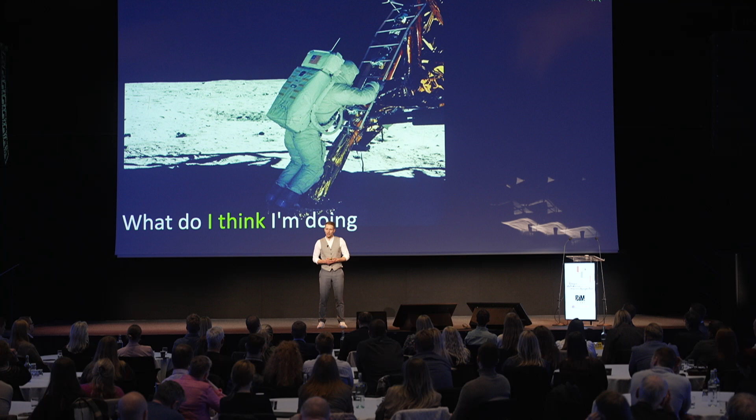80% of our work is really boring - meetings, reports, quality assurance - and only 20% we can just play and have fun. So in today's presentation, I'm going to show you how we can change this ratio, 80-20, to have much more fun with the use of programming.

As been said, I'm Krzysztof Wojslaw, you can call me just Chris. I've been working 10 years as a bridge designer in Norway. Two years ago, I started my own company called learngrasshopper.com. Today, on my learning platform, I already have 3,000 engineers and architects from all over the world, and we are together transforming engineers' and architects' work into fun with the use of programming.

For those who are maybe familiar, I'm also the BIM Corner founder, where every week we try to post new things about developments in BIM technology, especially in Norway. I'm also connected with the university - I really like to spread knowledge at NTNU, the Norwegian University in Trondheim, where we have lectures about Grasshopper, Python, and C#.

And it's really game-changing when the new generation of engineers come to work and already from the first day start to apply Python and Grasshopper scripts. I try to teach Grasshopper in a fun way, so it's more interactive. I really feel that gamification of all the tasks and exercises just gives motivation to all students. And coming back to the main topic, AI is everywhere.

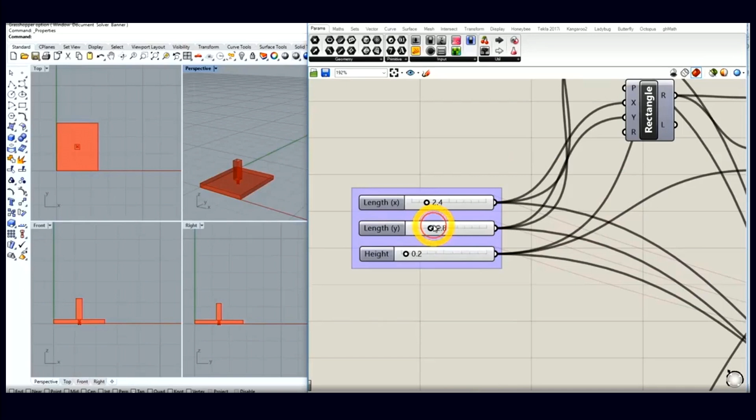As one parameter, we have the central force for the column, and we have the ground capacity. In this case, we would like to optimize the shape of this foundation.

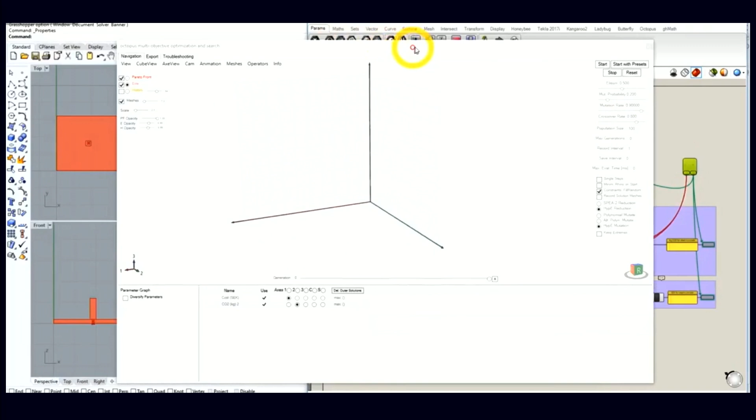But we, as designers, have to define what will be optimized. So we need to define new parameters: the price for concrete, the price for steel, and the CO2 emission per kilogram of steel and concrete. Now we have Octopus, a generative design engine, and we are clicking Start.

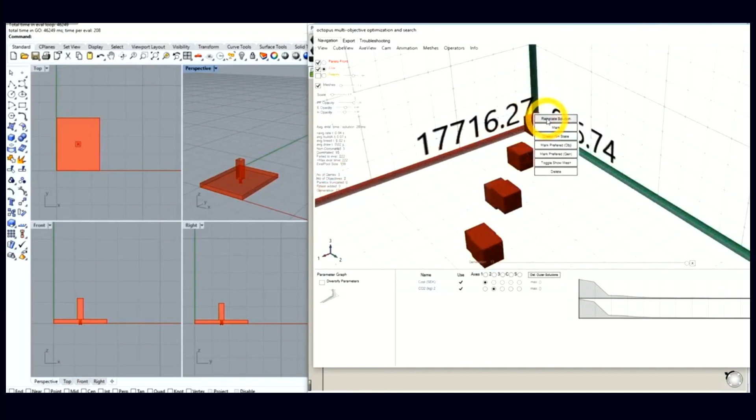We are going through thousands of iterations, checking all the solutions between boundaries, and at the end we have hundreds of solutions. On one axis we have the cost, on the other axis we have the CO2 emission. When we zoom into the solutions and look at where the axes cross, we'll find the best solution.

So this is the first reason why we should use generative design: to minimize the stress in our construction. But the second reason is to reduce stress in our work. Architects and engineers have lots of responsibility, safety factors, safety rules, and senior quality checks. But I really like this meme that actually shows the idea of our work.

So using computational power to go through hundreds, thousands of iterations, thousands of forces combinations can actually relieve stress in our work.

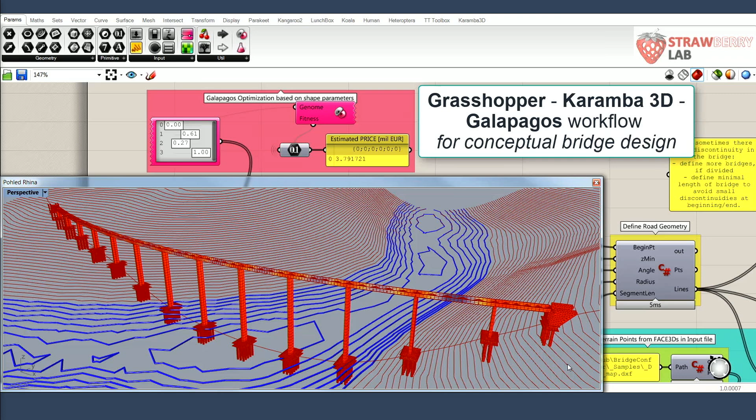I'm a bridge designer, so I have to show you one of the bridge design examples. In this case, we have Grasshopper connected with the finite element software called Karamba. We have a bridge design in two types. First one was a beam bridge with lots of columns in the river, and the second one is an arch bridge.

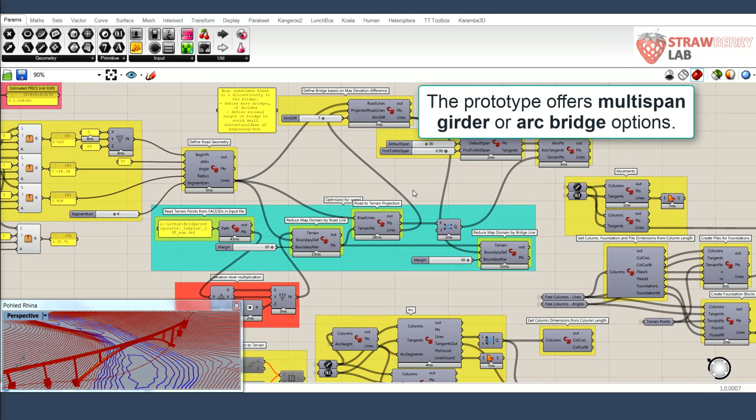Every time we are going to change this parameter, change the road line, change the radius, the length where this road line should start, and we are calculating the new bridge type. So we are not just checking two or three types of bridges, we are checking actually thousands of bridges. And again, this is not AI, it's just generative design.

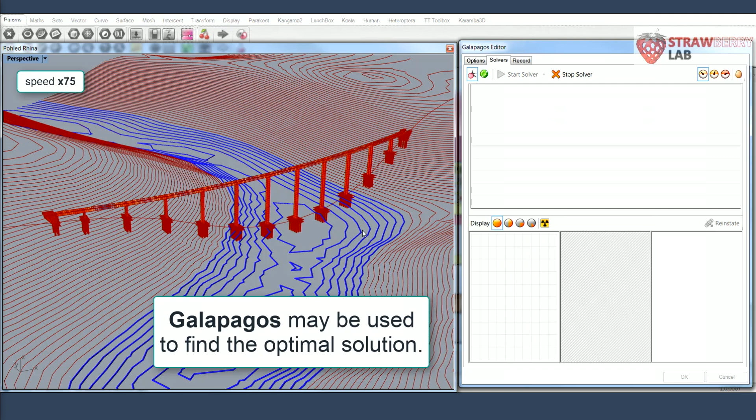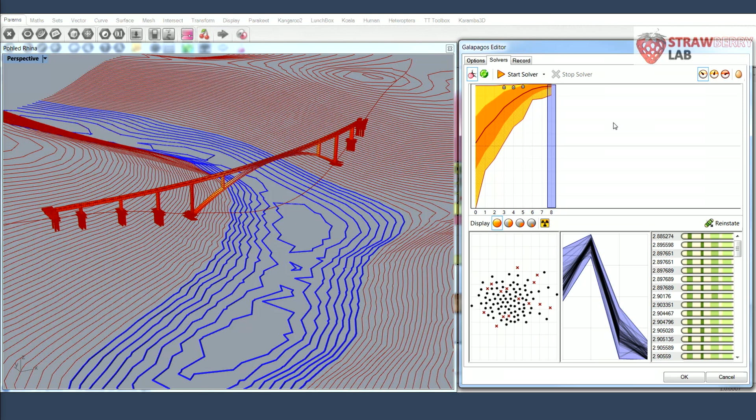The computer is changing all the sliders for us, and we are saving results. We are creating thousands of iterations, calculating every time a new type of bridge. After a couple of minutes, we see that the arch solution is the one we're choosing. So here we have an idea - maybe the beam solution for the bridge in this case will not be the most optimal.

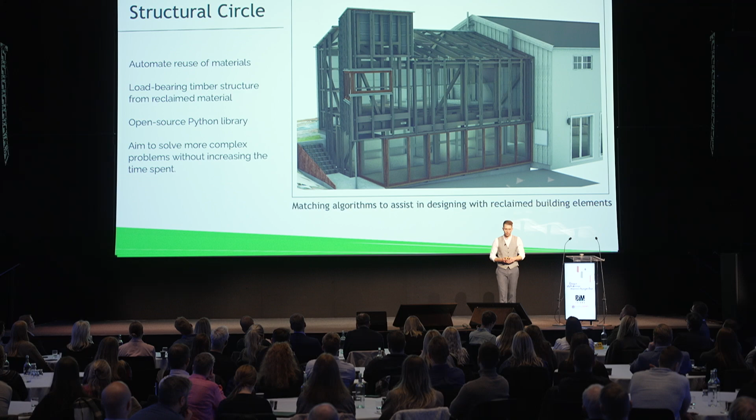Last example I would like to show you is work of my colleagues from Norwegian University and some of my students that I supervised. It's called Structural Circle. The building is based in Oslo, built with reclaimed timber.

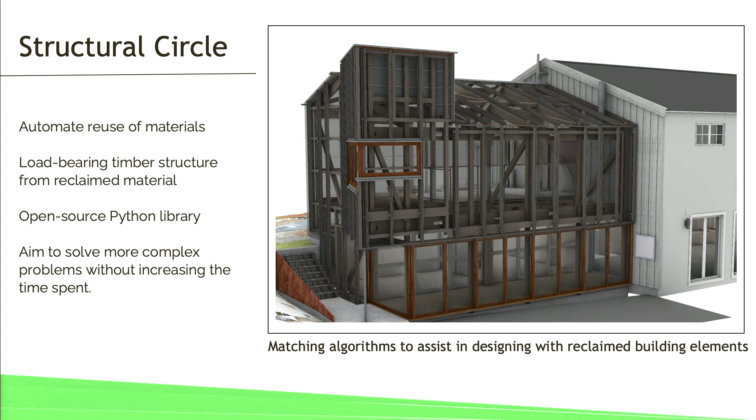So timber, in this case, was gathered to the workshop from different places. The first thing we have to do is sort it out - which timber is good to use - and then scan it into 3D to obtain a visualization of how we can reuse it.

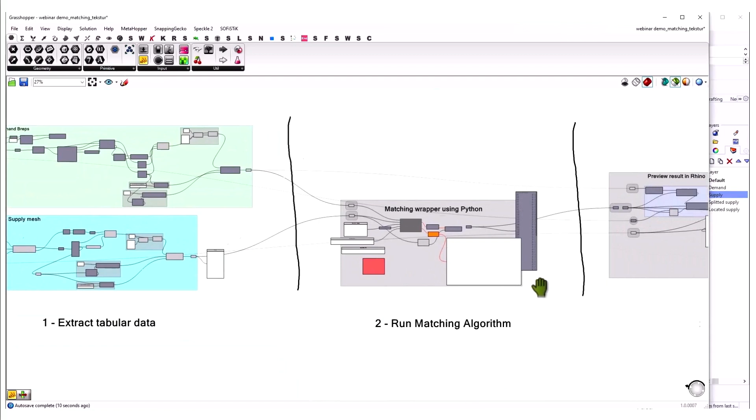So in this case, we have a script that first takes all the scans into the digital world. The next step, we take all the dimensions. Based on the scan, we find out what kind of representation it will be in our structure - taking all the dimensions for length, width, and moment of inertia for calculation.

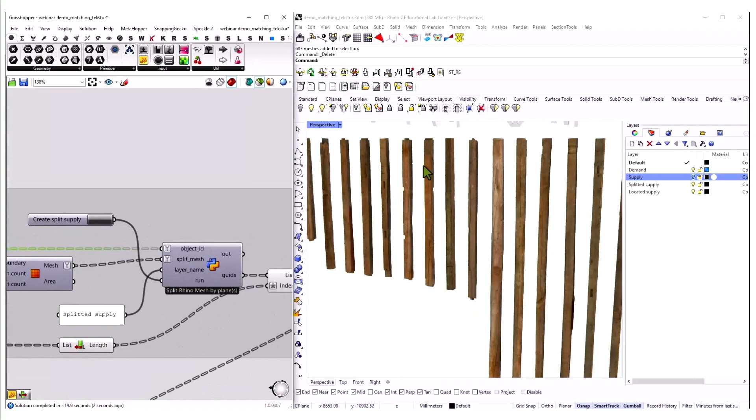The next step, we split every single element. For example, we have a 10 meter beam and we would like to split it so we can reuse it for the construction. On the right side, you'll see the algorithm that is, step by step, beam by beam, splitting all the elements that could be reused.

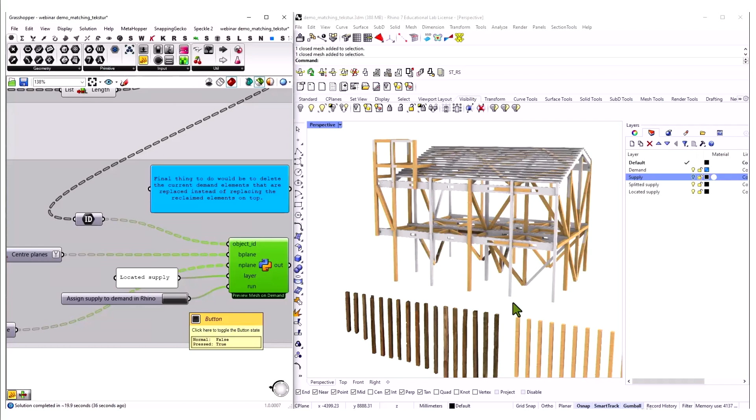The next part, actually the fun part - we are using Python scripting inside Grasshopper. So we don't go directly for text programming; we are still in this friendly environment, and we can just write a Python algorithm that finds out the elements that can be reused in our building.

And in this case, 80% of the elements that we found from different construction places were reused on that project. I'm really happy with this kind of open source project. This is the link for the research analysis - all the matching algorithm you can find on GitHub. Just download it and use it.

This is a point to develop our industry. Today, AI creates amazing scripts for Python, C#, C++, all the different languages. The reason why is because the IT sector has been sharing their knowledge on a daily basis. Over the last 20 years, all the people were gathering together on forums, sharing their knowledge, sharing their scripts.

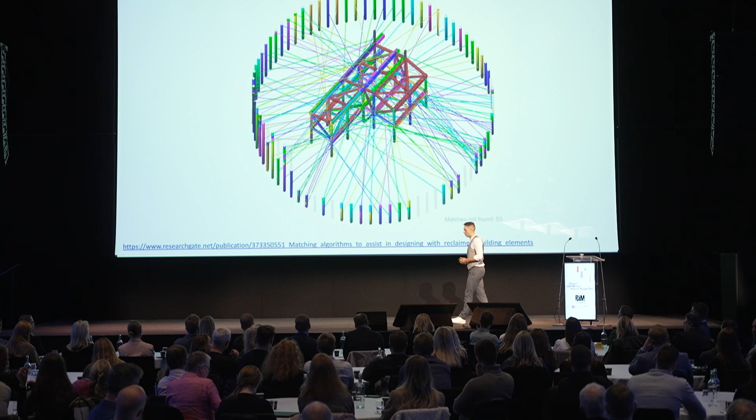We in the AEC industry together, we are still closed. There is not much work sharing. Of course, there are some company policies, but we're still missing the place to share it. So from this place, I really encourage everyone to be more open, to work with open formats, and also share their work with the community.

So coming back to the first slide - next time, if someone comes to me and asks, hey Chris, what does a computational designer actually work with? With a clear heart and clear conscience, I would like to answer that we, as designers and engineers, all contribute to more sustainable solutions. That's all for me. Thank you very much.